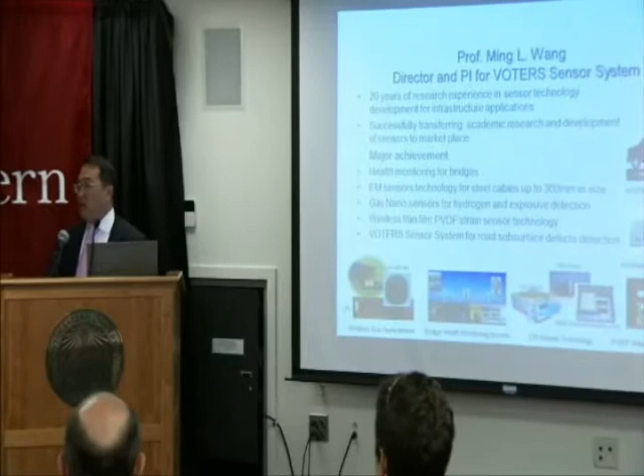As you can see here, in my history I tried to develop so many different kinds of technology. This is the last one, that I'm doing the VOTERS. But very early on, as you can see, the society has a need for infrastructure monitoring. And what is lacking is not only the system integration, which is the most important, but some of the missing links. Some of the sensors may not be good enough, or may not be convenient or cheap enough.

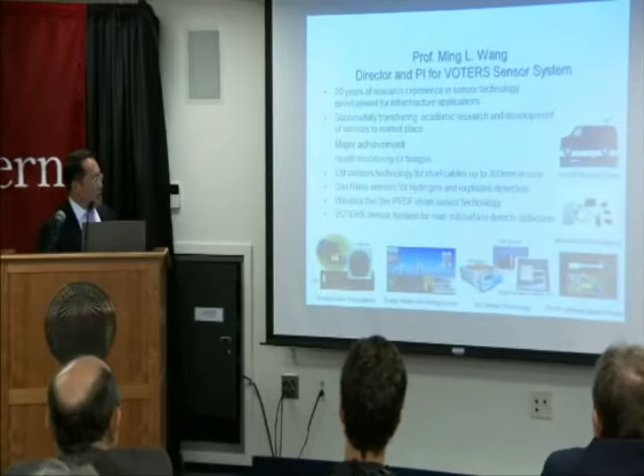So at that time, I started talking about wireless strain sensors, wireless networks, and also the system integration for a bridge system in terms of all different kinds of sensor arrays. And so from the last 10 to even 20 more years of experience, I feel it is hard to bring a new technology to the market.

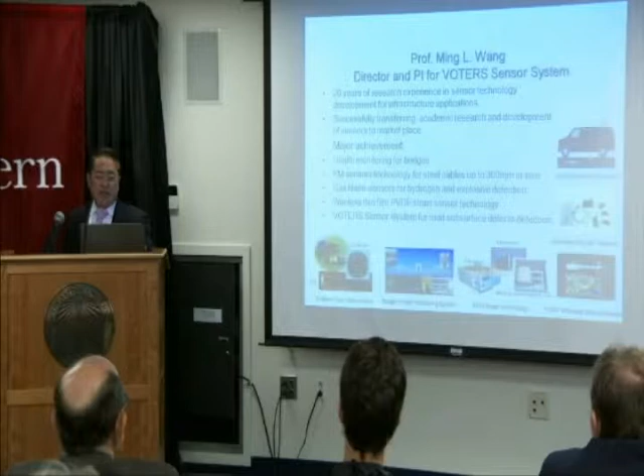And now, even if you're only using existing technology, you have a hard time, okay? Because your end user, which is the stakeholder, may not want whatever you try to provide. And so we have to communicate between the provider and the end user. And the end user part is very important, as you are going to see through our panel's discussion.

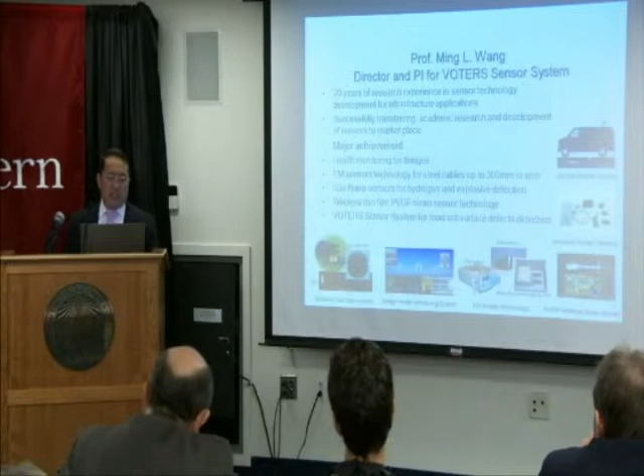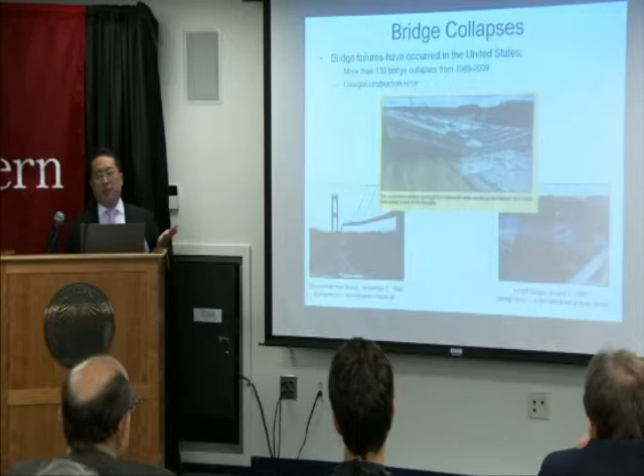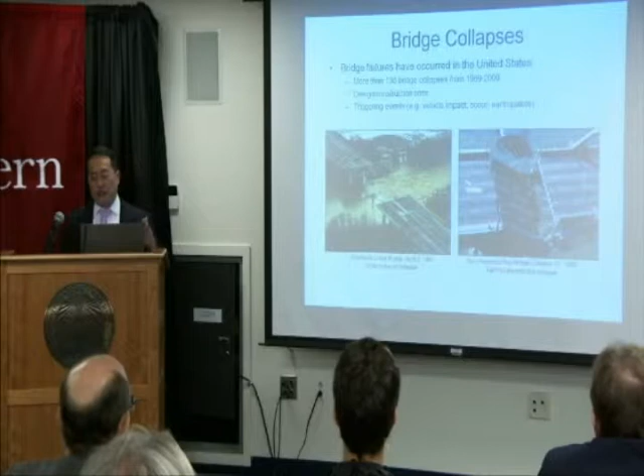We already know we have lots of stories and examples about bridge collapse. And a bridge collapse could sometimes be because of error due to the design, and also error during the construction. And somehow we also have failures triggered by large events like an earthquake or scouring from a flood, and also some impacts due to security reasons.

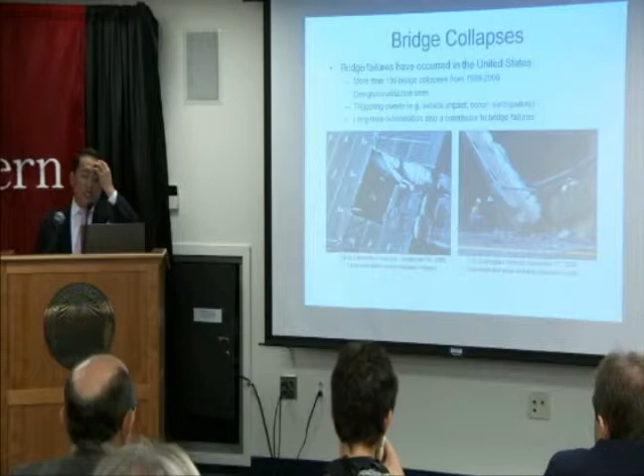So we have a lot of examples about all this, and a lot of them are related to long-term deterioration. And so health monitoring is about how we can predict the long-term health. And long-term means maintenance. So the maintenance related to long-term monitoring, you have to bridge that gap. And if we know this in advance, then we prevent it from failing or from killing people. And if we know how to maintain our structures, I think we're saving money in the long run.

And so let me describe what I mean by structural health monitoring. It's the integration of sensing and possibly also actuating devices to allow loading. A lot of the time we do not know the loading exactly. And the abnormal condition, I don't say damage, because a lot of the time it's only abnormal. It may not cause immediate failure of a structure, to be recorded. So you have a lot of databases.

You analyze them from your civil engineering point of view or from another physics point of view. You have to localize where the problem is. Some of them are very localized, some of them are global. You cannot solve the global problem from a local one. So you have to balance your localized solution with your global prediction.

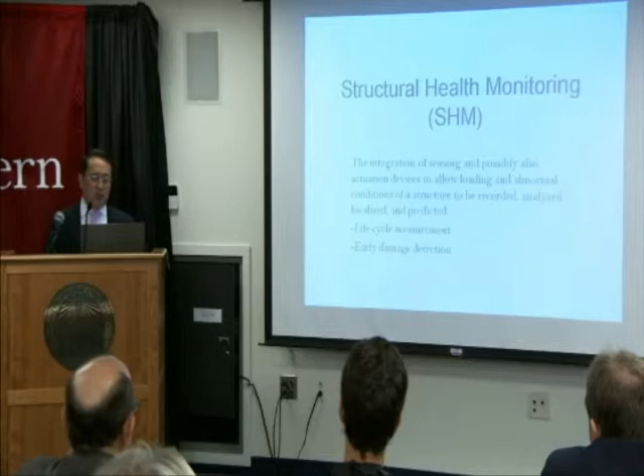And so eventually we hope we can predict, most importantly, our life cycle calculation. And hopefully we have structural health monitoring to do early warning detection. And those will be the two major ones. A lot of them you will see in NDE, non-destructive testing. Now non-destructive testing is not like that, okay? It's just trying to solve a more localized problem. And I hope this gives you a good definition.

So let me give you an example. If you talk to your vendor or your stakeholder, there must be a purpose for you to design a structural health monitoring system for them. And usually you see examples like to verify the as-designed condition, to verify the loading condition, which is very important, and to create the database for a baseline, because for a new structure you need to have a baseline.

If you measure after 20 years, you need to know their current resistance capacity, so you need to determine their baseline. To detect abnormality after construction, I'm not using damage most of the time anymore. To monitor extreme events such as typhoons, earthquakes, and also impacts. To monitor overweight traffic flow, which is very important for some countries.

A lot of our highways have been flooded with heavy trucks and so on. You have to monitor them. You have to know when they happen and how much the weight of that traffic is, to provide a database for maintenance priority. And that's what we do for a health monitoring system. If you can provide a very good database for maintenance purposes, then you have a value. You have an added value, not monitoring for the sake of monitoring.

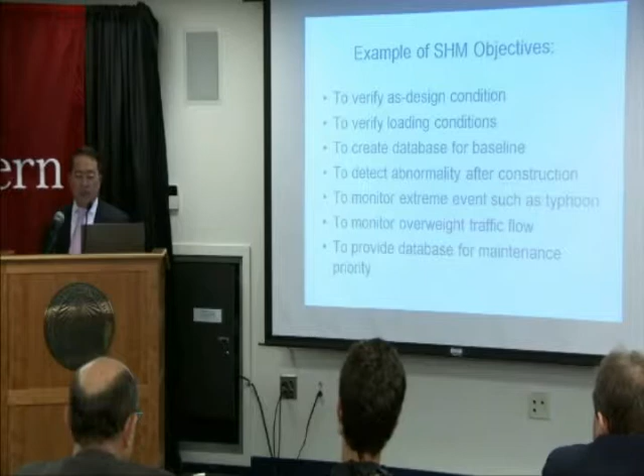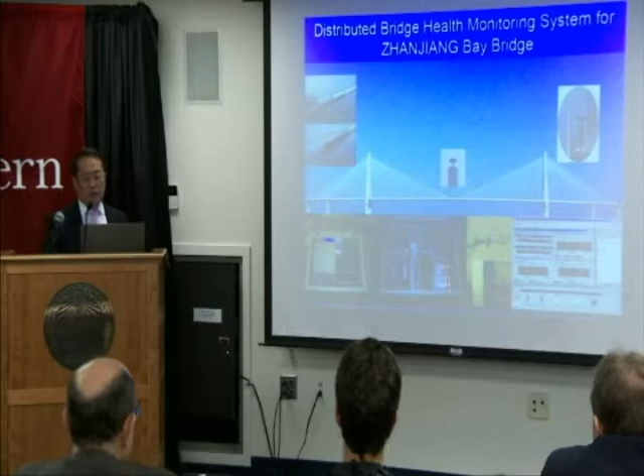Let me give you an example. This is Zhanjiang Bay Bridge, which was constructed by my colleague, Dr. Cao. He constructed this bridge, and I'm working with him to develop a health monitoring system for him. We both agree we want to create a simple system, but useful enough to check the condition, I mean the objective. So we try to keep the measures economical and to provide the most up-to-date sensor technology. So this is one of the examples.

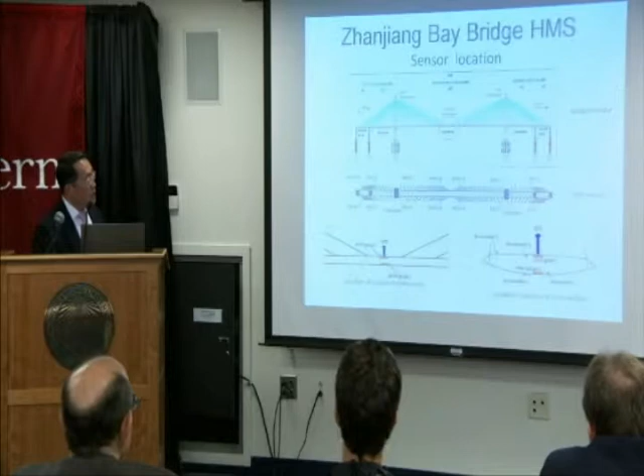In this bridge, as you can see, it is a large cable-stayed bridge, and we have sensors inside the bridge deck. We have a GPS and some other sensors. So, go to the next example. You can see this is the sensor we selected. Today I'm going to focus on this because that's what I developed, and this is what I brought into the market.

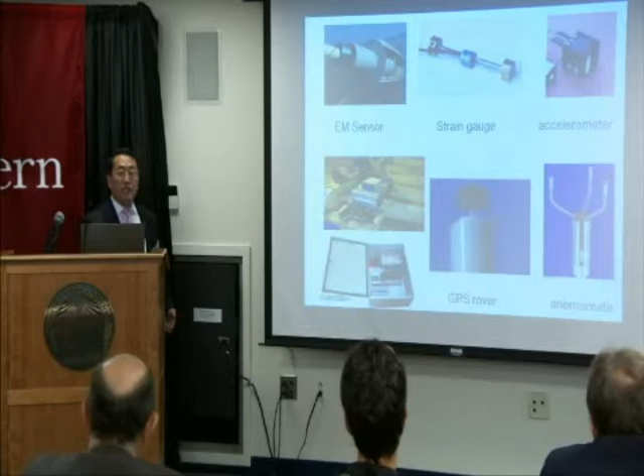And I want to show you, along with some other sensor systems, how you integrate them, with another system that we developed to integrate them, so that it can become a good solution for the customer. In particular today I will focus on this, because we're talking about from research to reality. This is part of our research, and right now it is a product on the market. This is what we call cable force measurement by electromagnetic technology, the EM sensor.

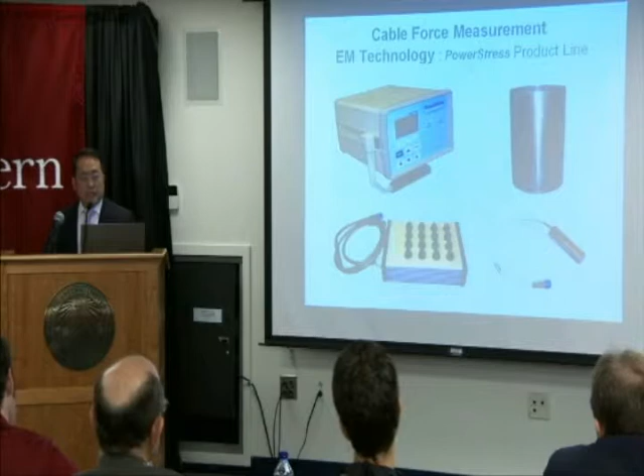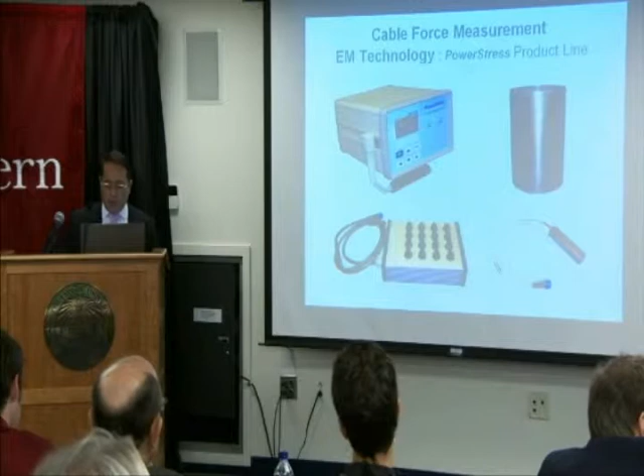So I'm transitioning my talk now from health monitoring to sensor technology. We know there are so many different sensor systems you can use, but today I'm focused on this one because it's from my life story. Along the way, I also developed the PVDF wireless strain sensor. Everything we started from fresh; the only raw material we bought was PVDF. We know how to cut them and devise them into wireless strain and temperature sensors. But it was not successful because they are not durable enough, by the way.

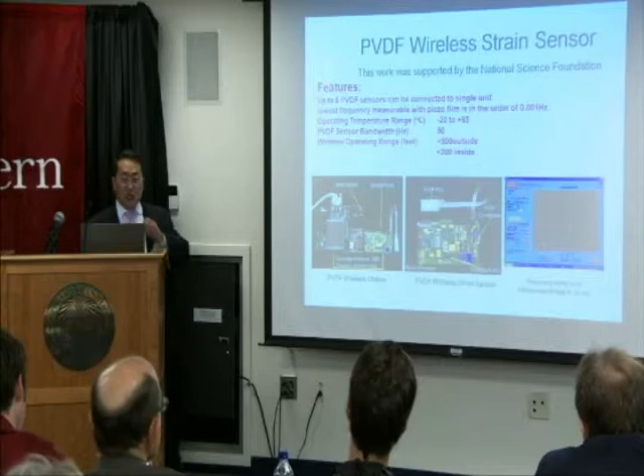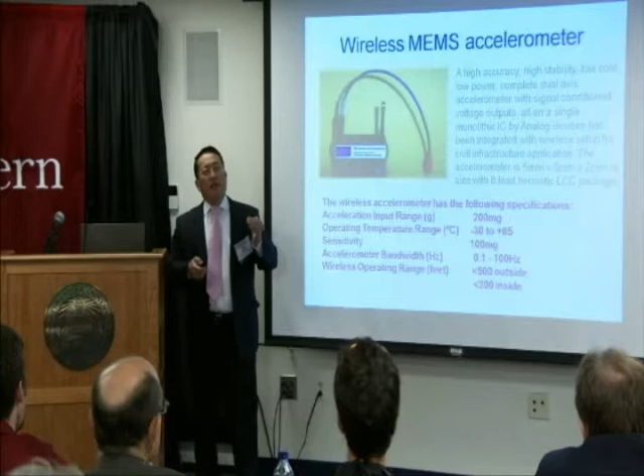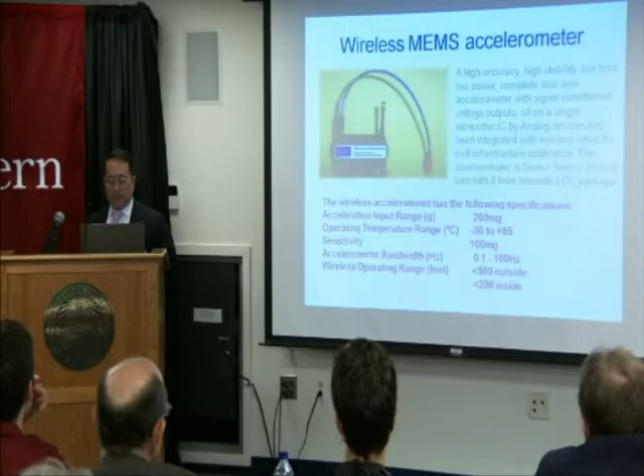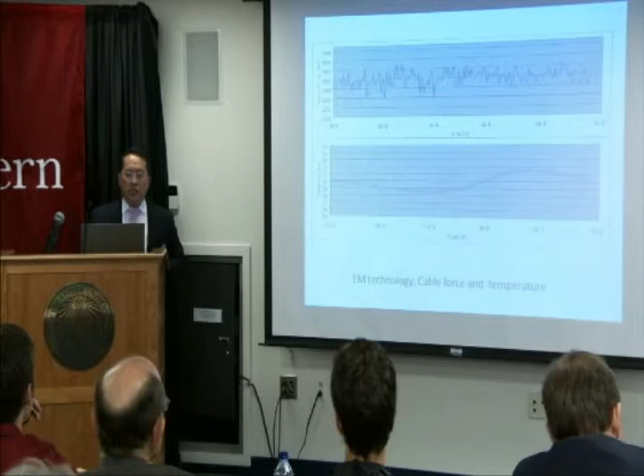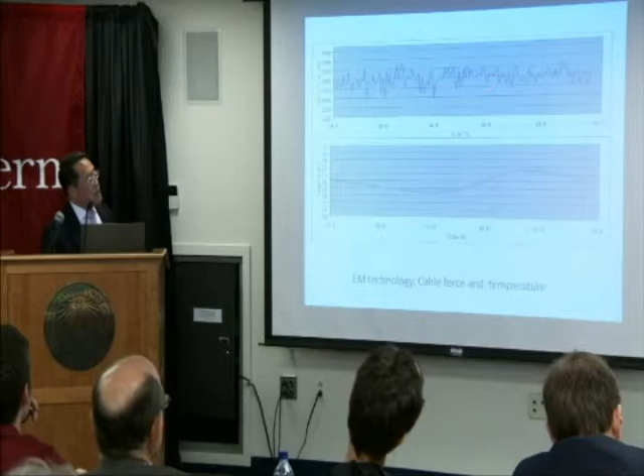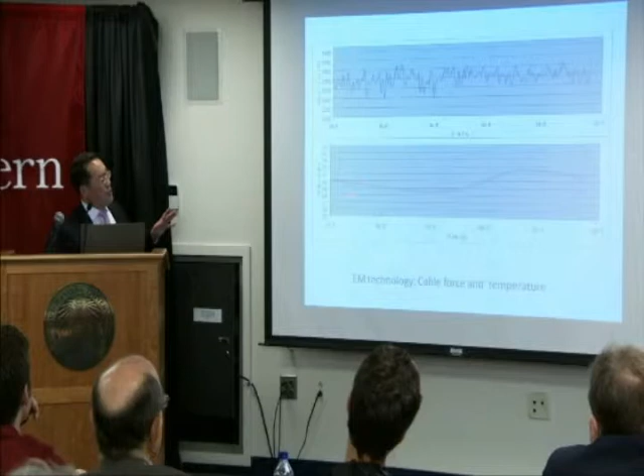So this is one of the examples. I'm not going to give you a lot, but for example, this is your force, this is your temperature you measure, and this is the force measured from your cable using the sensor. This data is important because you want to know the up and down variations, so that they stay within limits. And from the temperature, you want to see whether they respond to temperature or not, and so on.

I want you to take a look at this. This is a result from the cable force and the health monitoring system, from realistic data. As you can see, the sunshine comes from here, then moves and comes back at midnight. Your structure is realistically moving along the clock. It is alive because of the temperature movement. From here you can see whether there is an abnormality or whether it responds according to your calculation and design. Basically, when the sunshine comes out, how come you suddenly push so much?

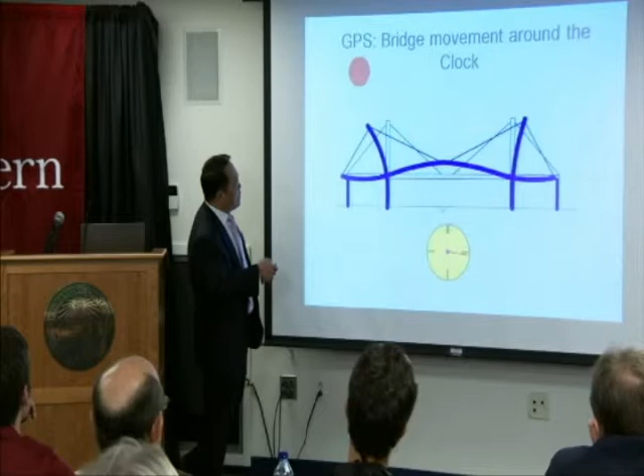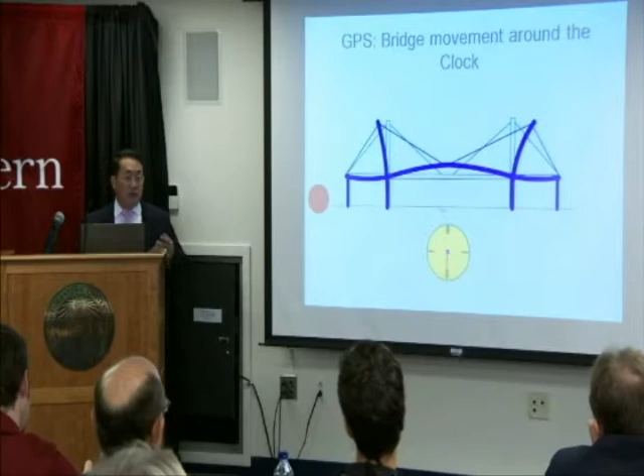Sorry about that. So basically, when the sun is moving, your tower is exposed to more sun from here, so it's hot, you get more heat. And then when you come in here, you are exposed to this side. So because of the side and the exposure of your tower and also your deck, you have a different kind of response. And this is from the measurement. This is not simulation. This is from the data. And so therefore, you use this information to do a lot of characteristics.

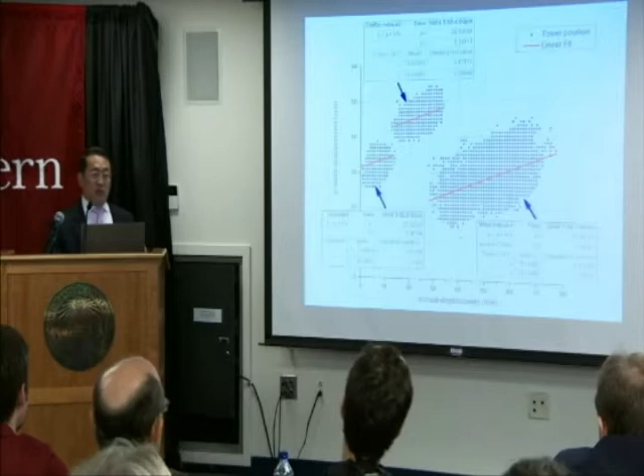This is the same bridge, and you can see this is without loading. That's at midnight, almost no traffic. This is during the heavy traffic. And this is during the typhoon. So in this measurement you can see dramatically the changing of the structure's vibration as well as the displacement. However, the line is very similar, so the structural integrity is kept very much intact.

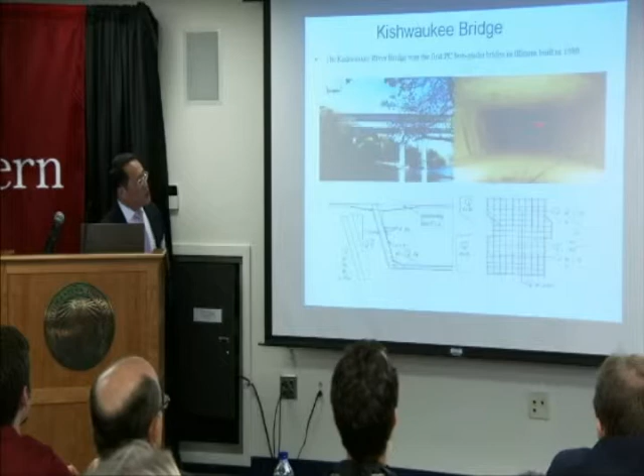So that's another example I did in the United States, over in Illinois. This is a box girder bridge. When I was first asked over there to do the monitoring, I found out there are so many cracks. And again, we devised this system, a kind of health monitoring system, and we kept this health monitoring system for 5 years until they retrofitted last year. So they have finished the retrofitting.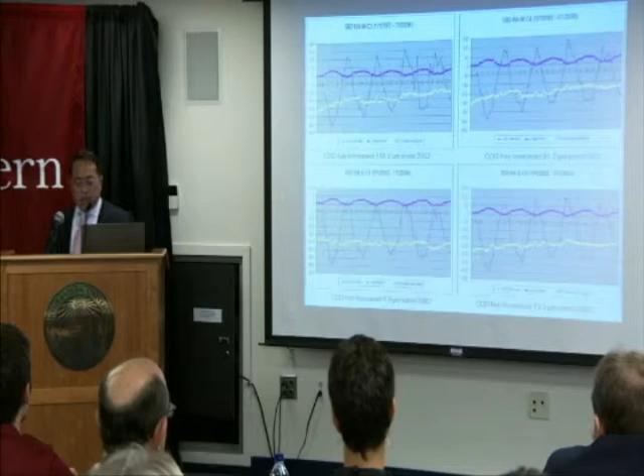And so with this kind of continuous monitoring, you will be able to find out the crack is very active. And that active crack increased about 50 to 60 micron in the last 5 years. Some of them are 110, some of them are much more. And so, therefore, the decision maker decided we need to retrofit the bridge, instead of destroying the bridge. At one time they were talking about rebuilding the whole bridge.

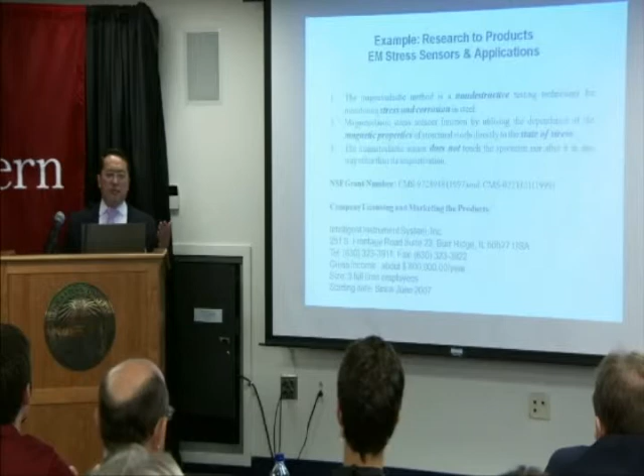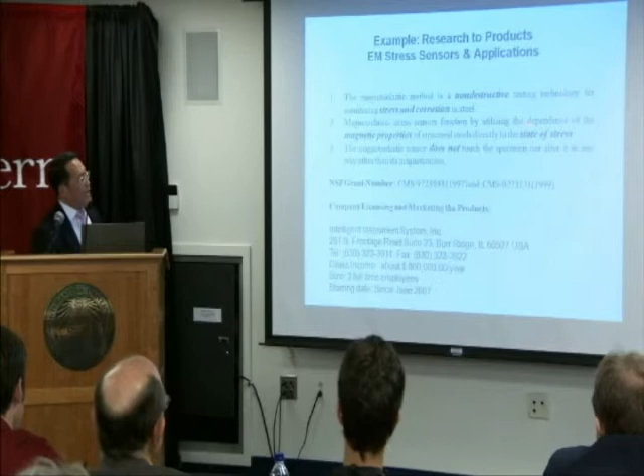All right. So let me go back to talk about the EM stress sensor. The EM stress sensor here, from the National Science Foundation program to the final company spin-out, is about 10 years' time. And the EM sensor is a non-destructive testing technology. We use that to measure the stress, not the strain, okay? The stress and then the corrosion or the force of the steel. So it's an electromagnetic sensor that is non-contact; the magnetic sensor does not touch the specimen. Actually, it's just a magnet to produce that.

So it's based on the property of permeability, meaning your excitation and your induction and the slope in between, that's called permeability, and your driving force, which is your primary force, and there is a certain linear relationship between them. At the lower induction force, the sensitivity is very high, but it's not very linear. But later on, you have a very linear relation between your stress and your permeability.

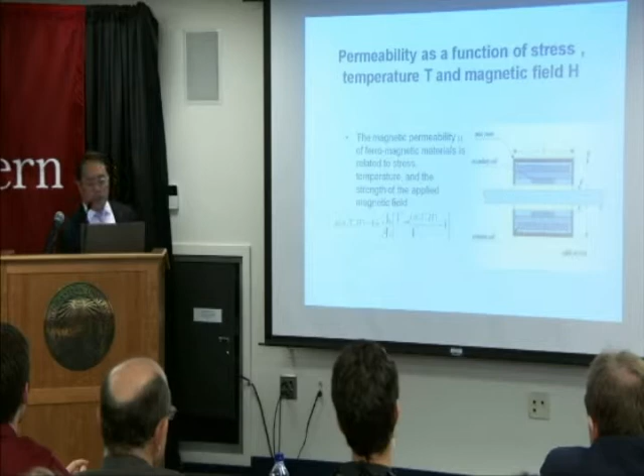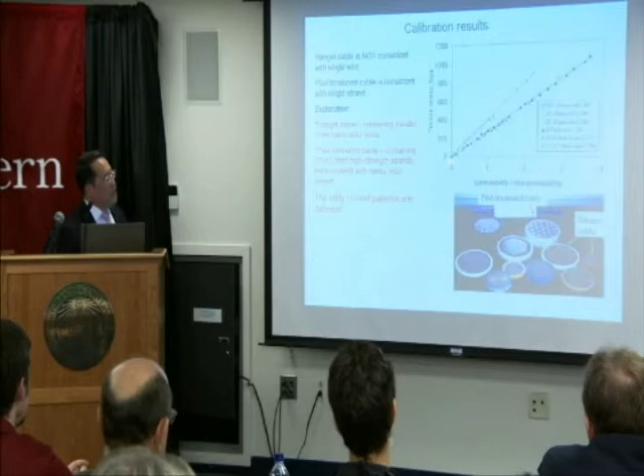And the sensor actually has a primary coil, a secondary coil, and a protection mechanism over here. And the equation is very simple. Your permeability is related to your stress, your temperature, and your induction force, your primary magnetic force. And as you can see, there are so many different kinds of cable. So we calibrate all these cables related to their different type. You can see from the very small to the larger sizes, they all fit a very linear curve up to about 60% of your yielding stress.

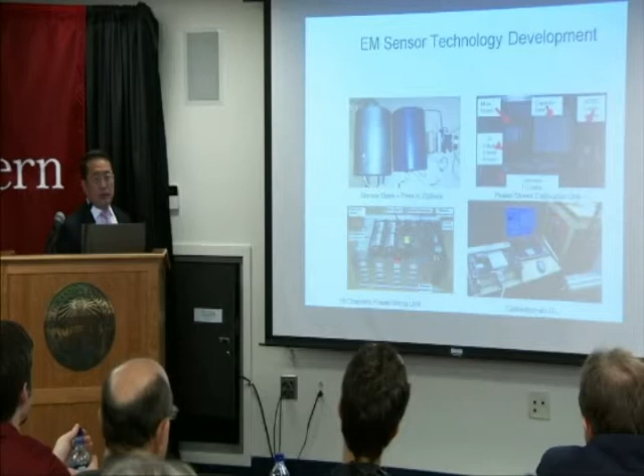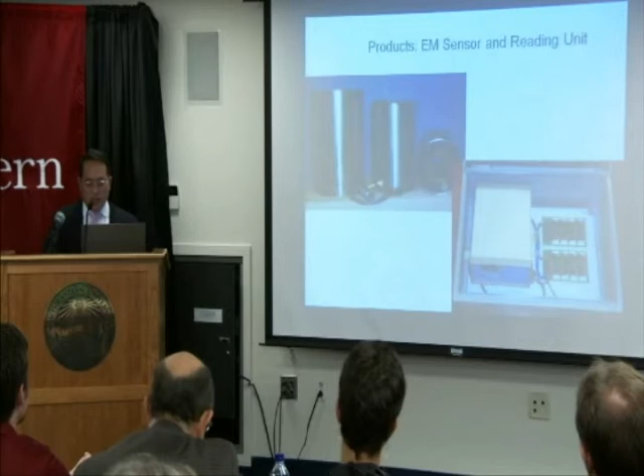All right, so from the very early development, you can see all different sensor sizes, and we even had to develop our own box and electronics. We didn't have anything else helping us except the voltmeter. And so from there, we had to develop all the electronics for many years. And eventually, it smoothed out, and you have very good sensor sizes developed. Some of them are very small. This one is used most frequently. And then we have a larger size for large cable. And this is the box that we use to generate the magnetic force.

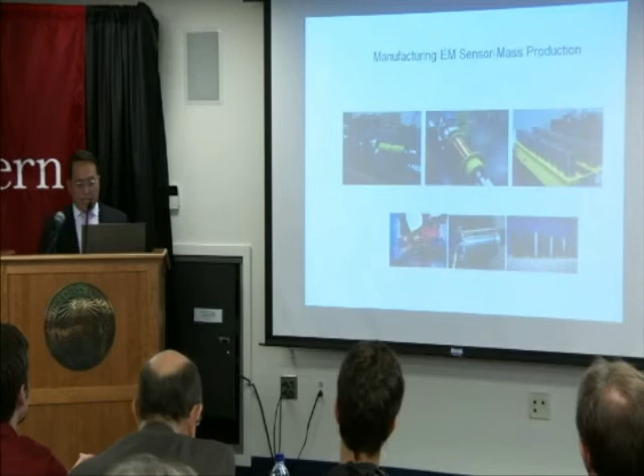And actually, the sensor can be manufactured in-house. And you can see here is mass production. And also you can manufacture it on the existing cable. It's a very important application because most of them are existing cables. And here you can also do the calibration and packaging before you ship to the site. So those are the kinds of business things you need to think about when you develop a certain sensor. How are you going to do that in a company setup, in an application setup?

And so that's another example of mass production of this sensor. Look quickly, I don't want to be too specific. But we currently use this a lot in retaining walls or the stability